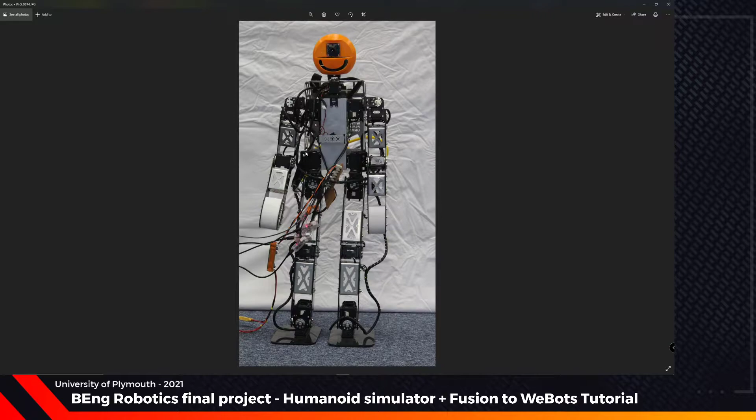Right. Problems encountered during this project would be, well, besides the physical access to the robot for 3D mapping of the entire thing, simulator support and tutorial availability. Basically, when you want to simulate a robot, you have to have a simulator, quite obvious, and the simulators in robotics are a fairly weird position, where the industry sometimes doesn't use them at all or uses their own custom simulators, and the ones that are available don't really have a lot of support either on YouTube or from the developers.

Now, the project initially was focused on making Scott Robot work, as in actually walking. However, COVID intervened, and the shift of focus happened when I decided that this isn't how hard it's supposed to be. Like, making mechanical modifications to the robot in a simulator shouldn't require you to know all that background stuff about ROS and about how robot kinematics work.

So this is why the focus of the current project is to make the entire process of getting into a simulator more streamlined.

Also attached to this project will be a paper submitted to TAROS 2021, which might be accepted, might not be accepted, that will focus on a comparison between two simulators in particular Coppelia Sim and the Webots.

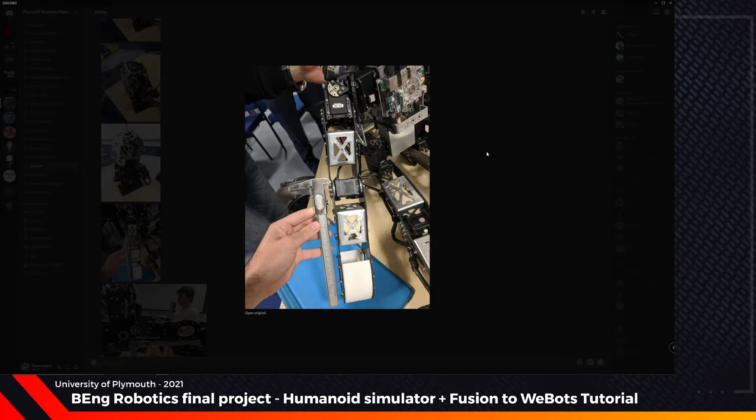Right. We had a lot of pictures from the robot. This is back in 2019. I started early on the project, and the way I personally mapped the robot into Fusion was by taking reference pictures with calipers in the picture and then using them as canvas in Fusion to recreate the piece up to scale.

And this is how it looks right now in Fusion. This is the final assembly. There have been quite a couple of iterations. Some of them actually got deleted, and there are different iterations for Webots, for Coppelia Sim, and for ROS.

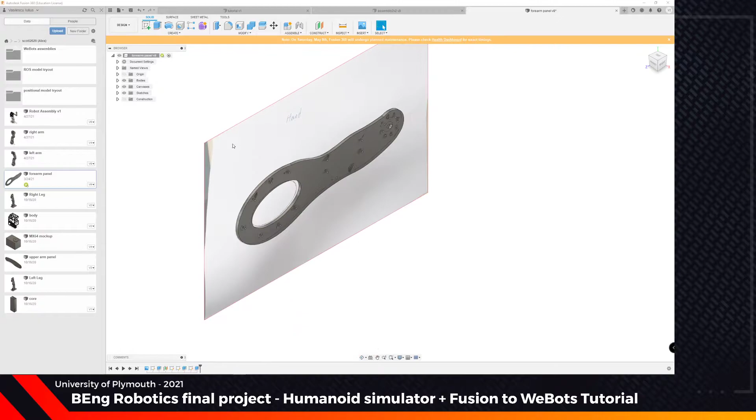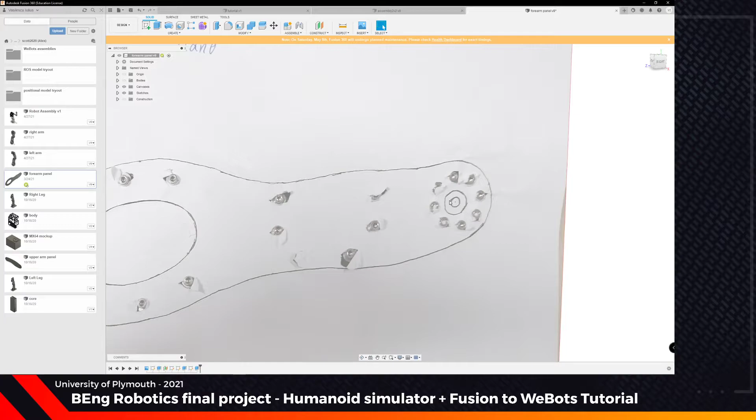However, this is the final one. And let me see if I can find one of the canvases. Okay, not from here. But for example, for the forearm panels, here we have the actual canvas just by taking a picture of a piece of paper where I drew the actual outline with a pen as it was holding onto the robot. You can see the screws popping in from the paper, because we needed very exact measurements of the center of axis for each motor movement.

And this is the process through which I went for each of the main pieces. If I'm not mistaken, they are supposed to be carbon fiber. The plain ones, and the other ones are just motors, and this is made out of aluminium.

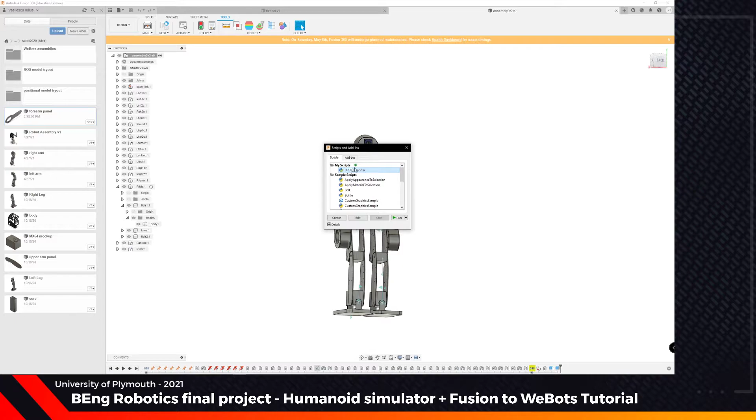One of the most important things when using this was using the script, going from add-ins and script and add-ins, and here is the URDF exporter. I will link both scripts that I used to streamline the entire process. One of them was used to output directly from Fusion to a URDF file with the meshes, with everything else, and the other one was used within Linux to convert the URDF and the meshes into a final proto file.

This is Fusion. Let's see what I can show you in RViz. RViz would be the integrated part of ROS that's supposed to show you with a graphical interface the 3D model.

So let's see, if we go to import tester, protos, and the final assembly. Oh, actually this is also part of the Catkin workspace, if I'm not mistaken. Yes, it is. I think this is the name of the file.

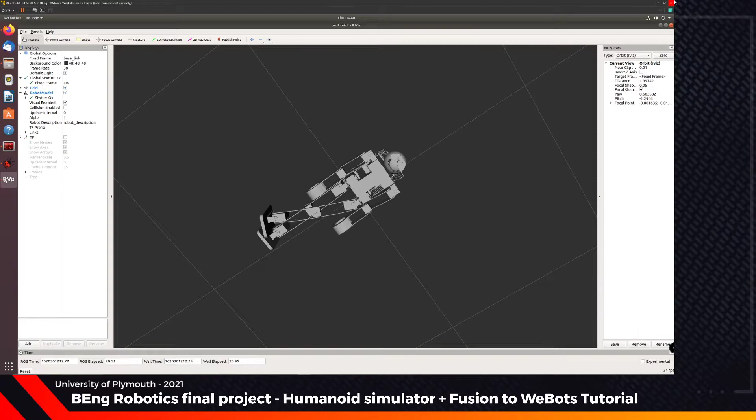So this would be RViz. For URDF conversion, let me see the command. Oh dear, it's slowly dying away.

So if we go to URDFs, we can convert the xacro files that the script exports naturally to a URDF file, which is the only one that can really be imported in CoppeliaSim in particular. And there it is—if we type ls, there we go, model.urdf.

The proto converter script, let's see if we can find it. Well, that's really going to be part of the tutorial as well, so no need to show it here.

And really that's about all I wanted to show here, except for some functionality of Webots which CoppeliaSim either doesn't have or it's really hard to use. This is currently the robot with a very simple controller that I created, and this is live rendered.

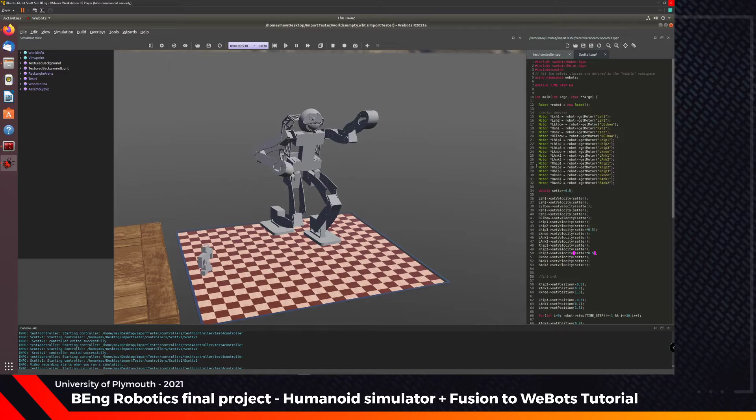In order to modify the controller and make it execute again, I can simply save it, build it, and the entire system will reset. So for example, if I modify something here, I'm going to save it, build it, it's going to ask me if I want to reset the entire world, and it's going to execute it again.

And this is within real time, but it can be sped up quite a bit. So for example, this is the same simulation being sped up.

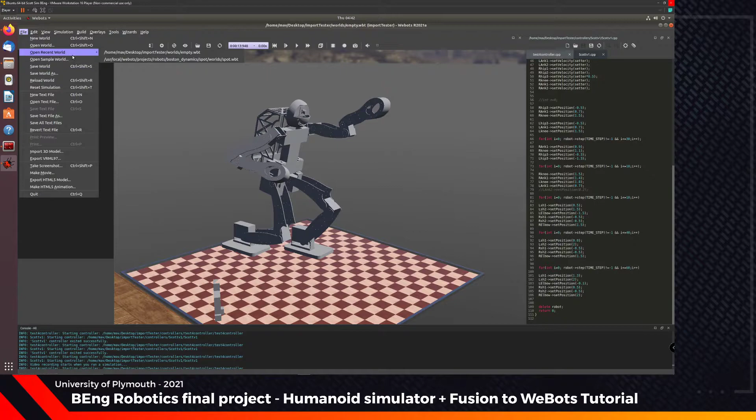Webots can be used for much more. I simply didn't have the time within the project to get it to work even more.

For example, it can be used to render live camera feedback without using an actual camera. And it does have a heck of a lot of tutorials. For example, this is Spot Mini. And this is with live camera feedback.

So let's see if we can... yep, there we go. So this is with live feedback of Spot Mini, and they also have simulators of drones, simulators of e-puck, simulators of everything, including tutorials on how to connect it with ROS.

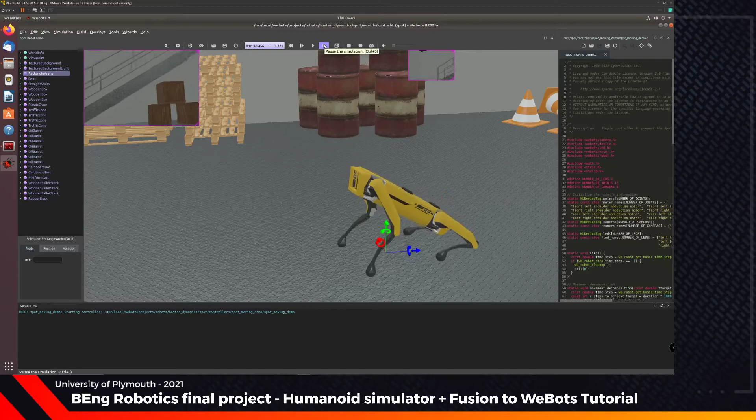Let's see if we can actually get it to work with ROS right now. So if we go to robots, probably somewhere in here.

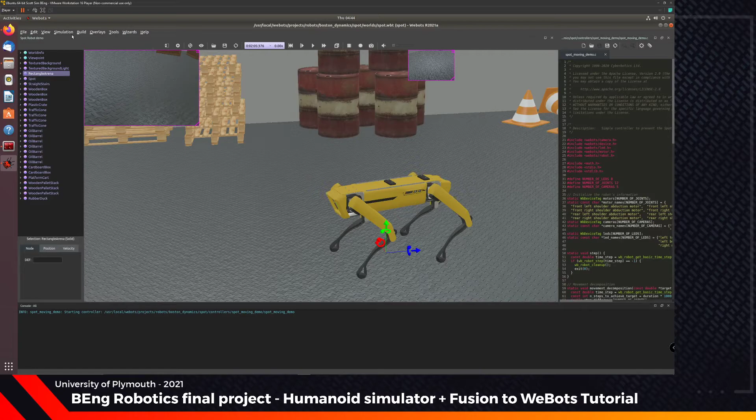Okay, so I don't really remember where it is. It's within one of the tutorials anyway. Right, this is pretty much my project currently.

And now we can start work on the actual tutorial. So I'm going to reset everything. Right, so for the tutorial,

the basic idea is to be able to get something from Fusion all the way to Webots, to a nice simulation without having to write manually the scripts describing every single kinematic piece of the robot. Because technically you're already doing this in Fusion with drag and drop and other options, so there shouldn't be any need for you to write manually.

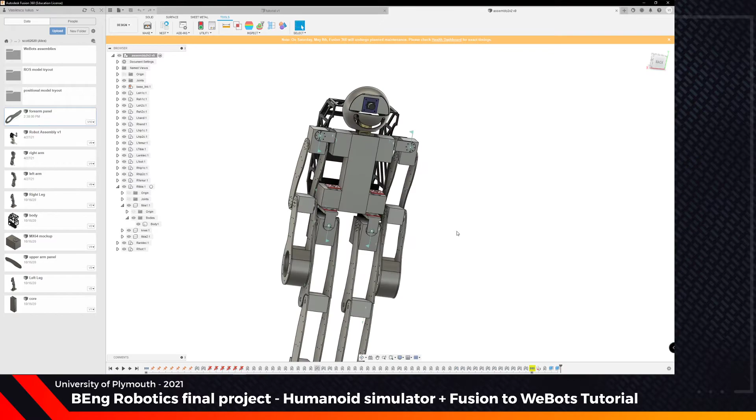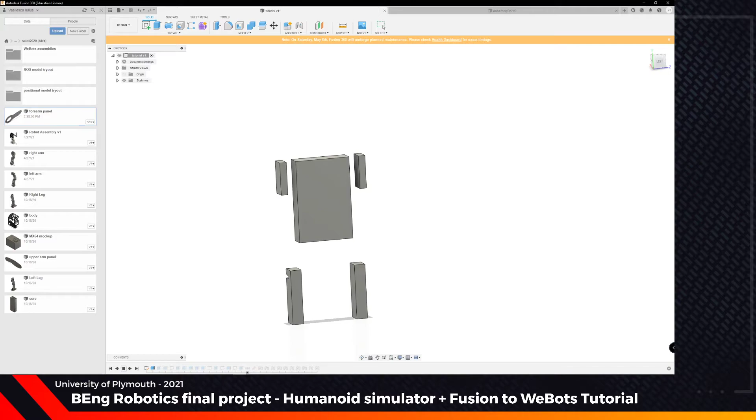This is especially important in humanoids simply because, well, right here I have 20 links easily. Technically there are about 50 components in here, but only 18 or 20 motors. Right, so this is a very basic model of a humanoid that I created with the joints.

What you have to keep in mind with Fusion, with the script that I will be putting in the description, the link, is to have the base link contain all the static pieces connected to the body, and ideally you would have this as the main piece of the robot as the base. You can have it otherwise, but it's simply not recommended.

And the revolute joints need to be all part of the main component file, not part of each component, because they will not be exported with the script. Also, the joints need to be—the body needs to be the master, and the slave component needs to be the first one that you actually click on.

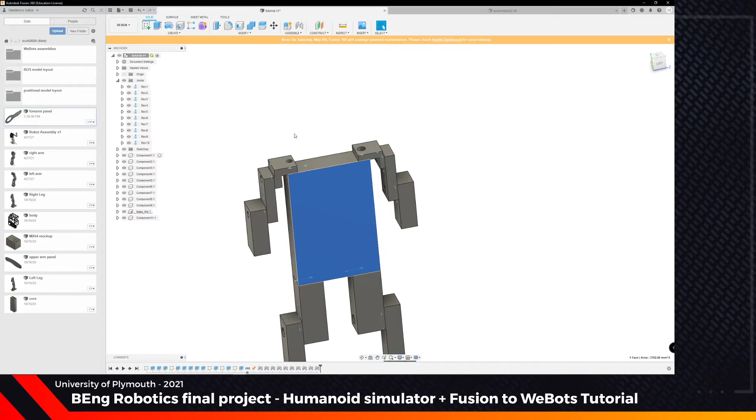So this is going to be the master, and if we're talking about hierarchy of the robots, you have this chain as a hierarchy chain. So this is the child of this, which is the child of this, which is the child of the main body.

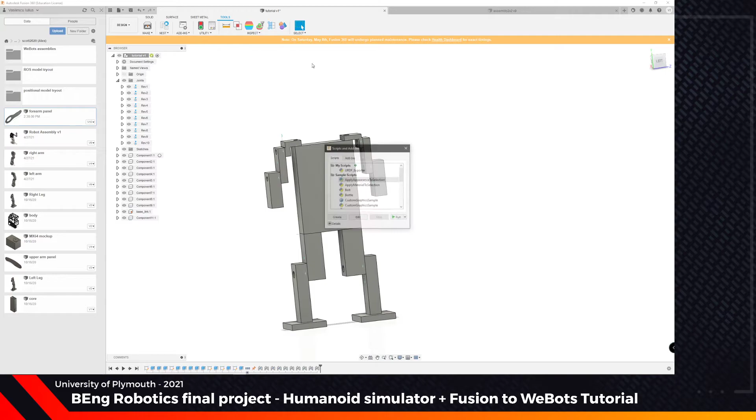Now if we want to export it with the URDF exporter script, okay, we're going to put it within the tutorial folder, and it should tell us that everything is just fine. Perfect.

Right, let's check it out. See if it actually got exported properly. Tutorial description, URDF tutorial.xacro.

If we open it with notepad, we can see the components as well as the joints. Ideally, you would have both the components and the joints with very specific names so you can easily remember them, because you will need these names once you start programming the robot in Webots.

The next step would be to get the entire thing into Ubuntu. I am personally using Ubuntu 18 with ROS Melodic, if I'm not mistaken.

Once you create your ROS workspace, you can put this within Catkin if you want to have a try at getting RViz to work. But for this particular tutorial, that's not needed, so we're just going to copy it onto the desktop. Now that we have it in Ubuntu, we can go ahead and start Webots.

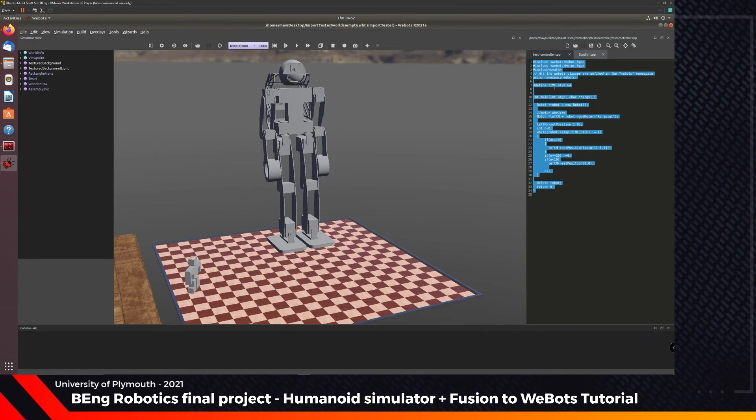Let's borrow some code from here. So we're going to be using this code in particular, but if you go through the tutorials, you can just use their code. It's pretty much the same.

In order to create a controller for this, we're going to go through the wizard's new robot controller with C++, because personally that's what I prefer. You should probably name it something else other than Webots controller.

Then we're just going to paste in the code, and I do have for sure a revolute joint called rev2. This is how you connect everything if you're using C++.

Now to enable the controller, you can just go to controller here and select something else. We have just created my controller, so let's use that. We should save the controller and build the controller as well, and it's going to always prompt us if we want to reset or reload the world.

And now if we start the simulation, there you have it, the joint that's actually moving. And this is pretty much how you get from Fusion 360 all the way to a simulation, a mechanical and programming simulation in Webots.